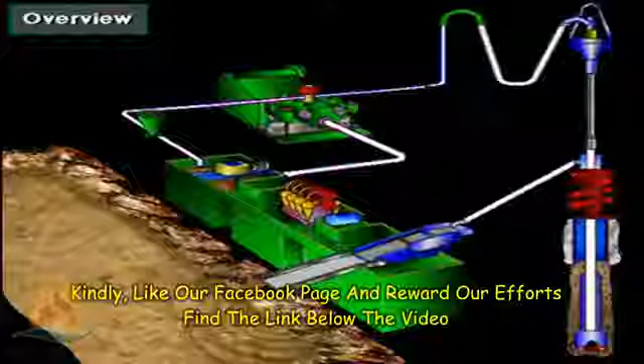The rig uses many pieces of equipment to circulate and treat or condition the mud. Mud circulation begins here, in the mud tanks, sometimes called the pits. Crew members prepare the mud in these tanks and make it ready for circulation.

The heart of the circulating system is the mud pump. Often, rigs have two pumps, one primary pump and one for backup. Or, if hole conditions require it, the driller can compound or combine the two pumps to circulate large volumes of mud. In fact, on deep wells, the rig may have 3 or 4 compound pumps.

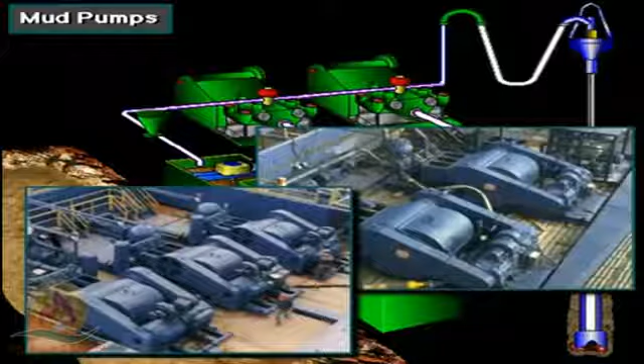The powerful pump or pumps pick up mud from the mud tanks and send it to the drill string and bit. The pump moves the mud into the discharge line, up the standpipe, and into the rotary hose.

The standpipe takes the mud about halfway up the mast. The rotary hose is attached to the standpipe. It is a strong, flexible hose that moves with a swivel as it goes up and down in the mast.

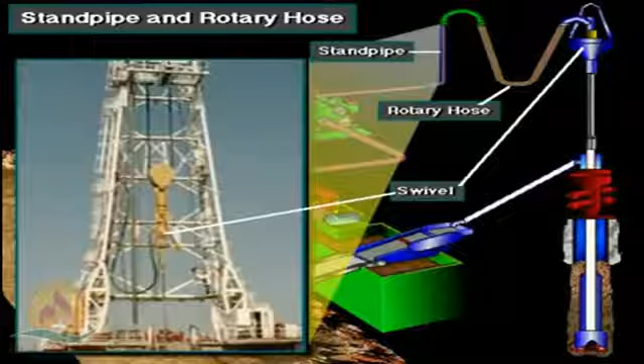From the rotary hose, the pump moves mud through the swivel and then down the Kelly and drill string. On rigs with a top drive, the mud moves through a passage in the top drive and then into the drill string. The pump moves the mud down the drill string to the bit.

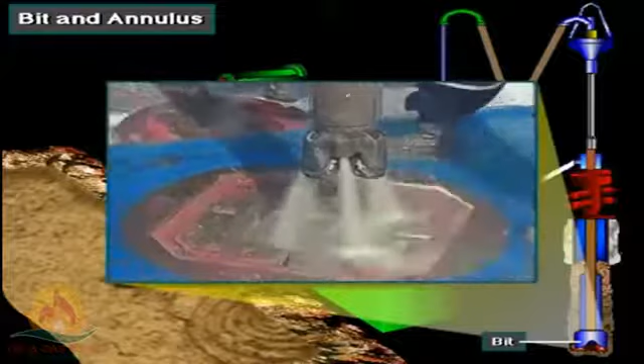At the bit, the mud jets out of the openings or nozzles in the bit. The jets of mud move cuttings away from the bit. Mud then continues up the annulus, carrying the cuttings with it.

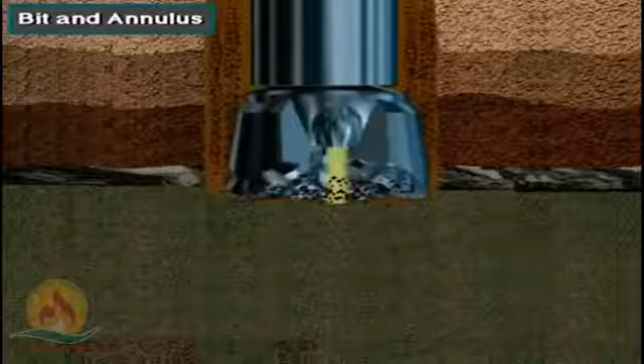From the annulus, the mud with the cuttings in it goes through the return line, sometimes called the flow line, to the shale shaker. The shale shaker removes the cuttings from the mud. The mud then falls into the mud tanks, where the mud pump can pick it up and continue the circulation process.

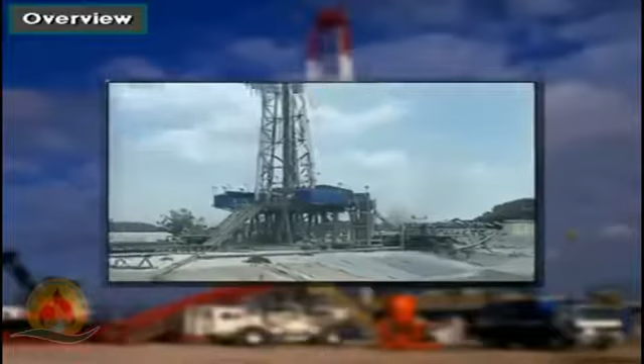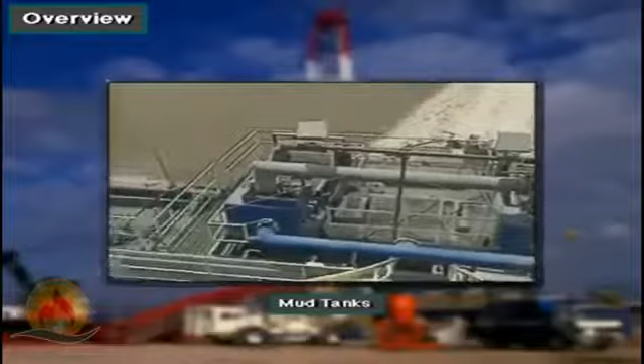Mud is made up at the rig location. Most rigs have several steel mud tanks. Mud and additives are mixed and held in the tanks.

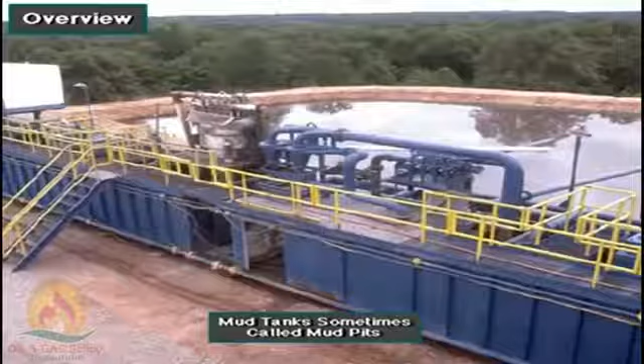Some land rigs also have a reserve pit dug out of the ground. Mud tanks are also called mud pits, a carryover from the days of earthen pits, but mud tank is the preferred term. The rig does not necessarily use all the mud tanks at once, although it does use several. The active tanks hold mud the pump actively circulates.

Often, mud components come to the rig in sacks. Normally, the crew stores the sacks in a special compartment called the mud house or sack room. The house or room keeps the sacks dry and allows them to be stored with care.

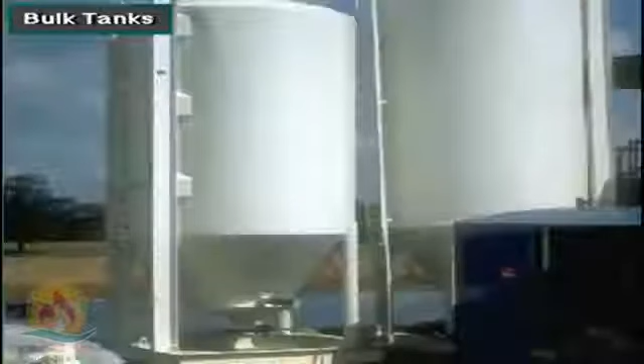These silo-like tanks are bulk tanks, or P-tanks. They hold mud additives like barite and bentonite. Crew members use some additives in such large quantities that suppliers load them into the bulk tanks to save time and money. Bulk tanks usually have their own hopper or pneumatic system for transferring the additives to the mud system.

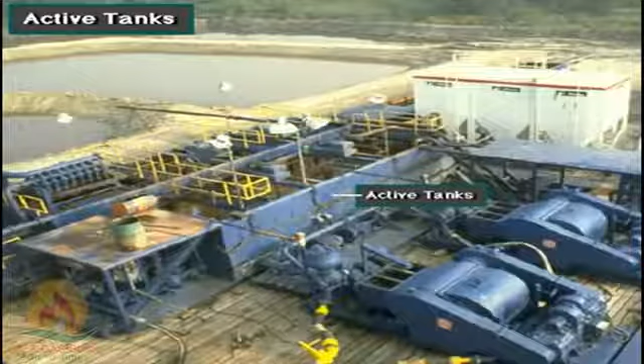The pump takes the mud out of the active mud tanks and circulates it through the system. Crew members connect the mud tanks with the piping and manifolds. The number of active mud tanks depends on the amount of mud needed to keep the hole full, and the volume required on the surface to keep the mud in good condition for circulating.

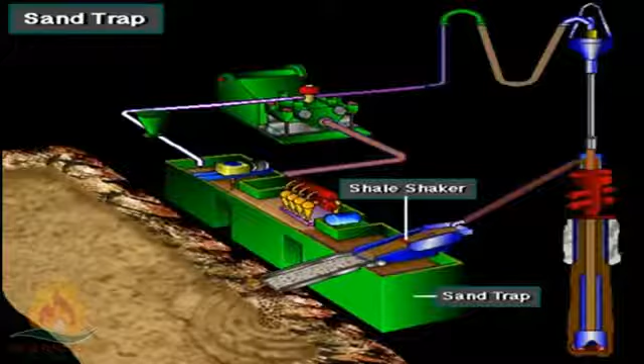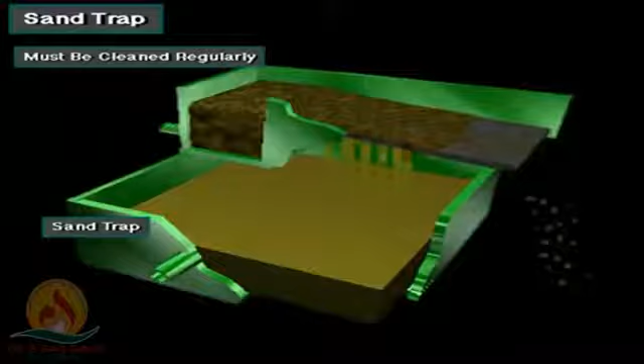The sand trap is the tank directly below the shale shaker. The shale shaker removes most of the cuttings from the mud, but some are so small the shaker cannot trap them. These fall into the sand trap, the first settling tank. Crew members have to clean it regularly to remove the built-up solids.

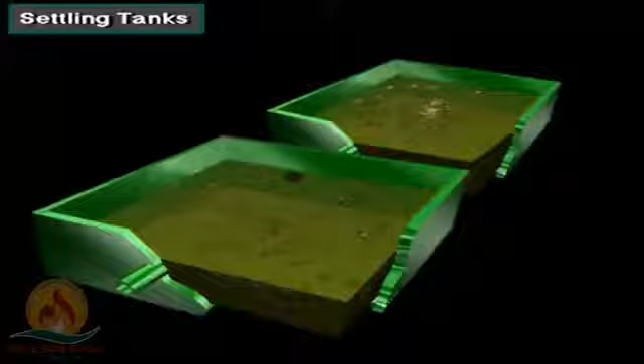Some small or old rigs may have 2 or more settling tanks in the tank system. They allow solids in the mud to settle out, but settling tanks do not do a very good job compared with newer generation solids removal equipment. So, today, most rigs use a desander and desilter. Reserve tanks are not a part of the active mud tank system.

The crew uses some tanks to hold excess mud, or to mix a different type of mud than the pump is currently circulating. They may also store heavy mud in them for emergency well control operations.

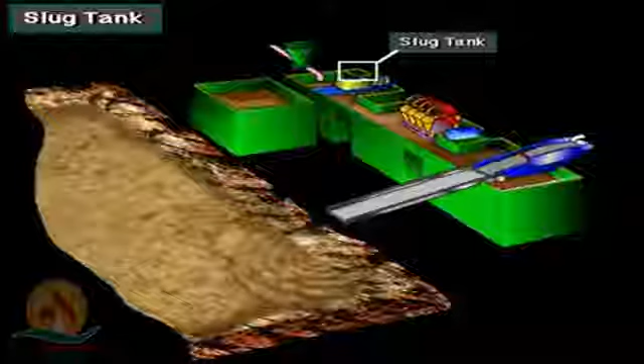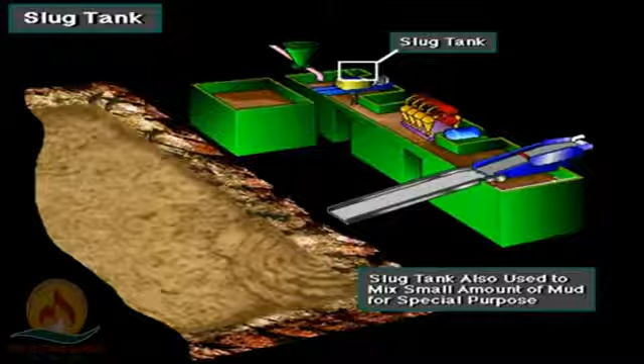A slug tank is a relatively small separate tank, or it may be a small separate part of a larger tank. The crew uses the slug tank to mix a slug, a small amount of heavy mud that is pumped down the string. Crew members may also use a slug tank to mix a small amount of mud for a special purpose. For example, the driller may need to place or spot a small quantity of high viscosity mud, also called a pill, at some point downhole.

The suction tank is where the mud pump picks up mud ready to circulate downhole. Mud in the suction tank should be clean, free of solids and gas, and properly formulated or conditioned.

Crew members use the chemical tank to mix special chemicals, such as caustic, that they will put into the active mud tanks.

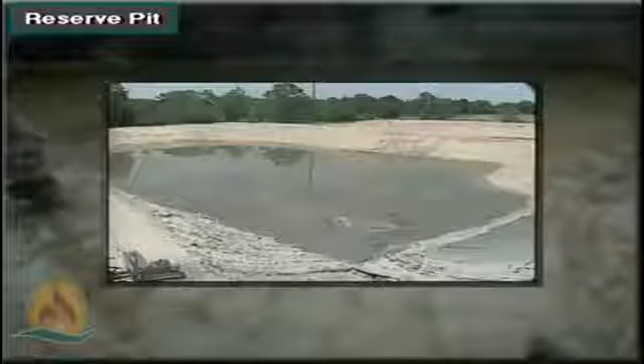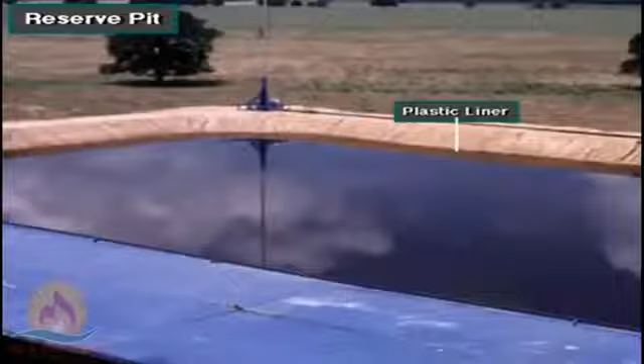On some land rigs, the rig owner digs a large pit next to the rig. This pit is called the reserve pit. The crew puts waste mud and runoff from the rig site in the reserve pit. In an emergency, they can also use it as a place to put more mud than the tanks can hold. Often, the rig operator lines the reserve pit with a thick plastic sheet to prevent liquids from leaching into the soil. And, if the rig is on a migratory bird flyway, the operator covers it with netting to keep waterfowl from landing in it.

Land rigs drilling in environmentally sensitive areas will not have a reserve pit. Instead, wastes and runoff are hauled to an approved waste disposal area.

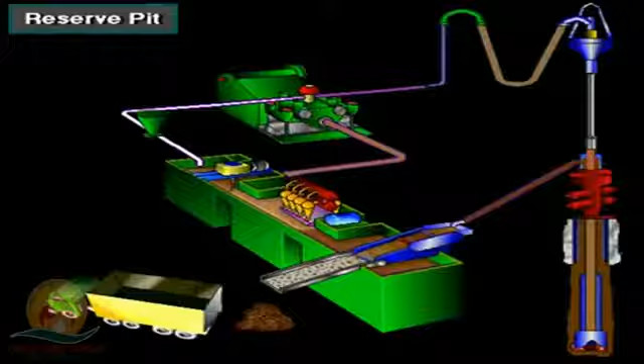Powerful mud pumps pick up mud from the suction tank and circulate it downhole, out the bit, and back to the surface. Although rigs usually have 2 mud pumps, and sometimes 3 or 4, normally they use only one at a time. The others are mainly used as backup in case one fails.

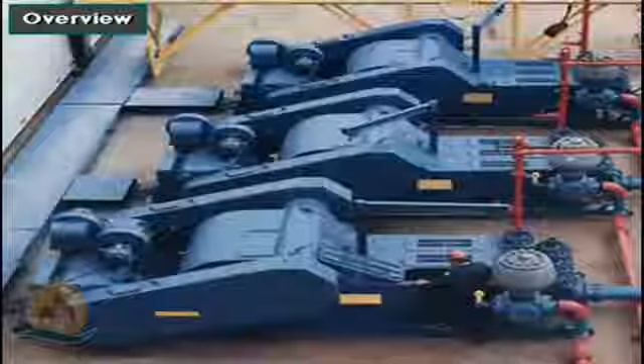Sometimes, however, the rig crew may compound the pumps. That is, they may use 2, 3, or 4 pumps at the same time to move large volumes of mud when required.

Rigs use one of 2 types of mud pumps: triplex pumps or duplex pumps. Triplex pumps have 3 pistons that move back and forth in liners. Duplex pumps have 2 pistons that move back and forth in liners.

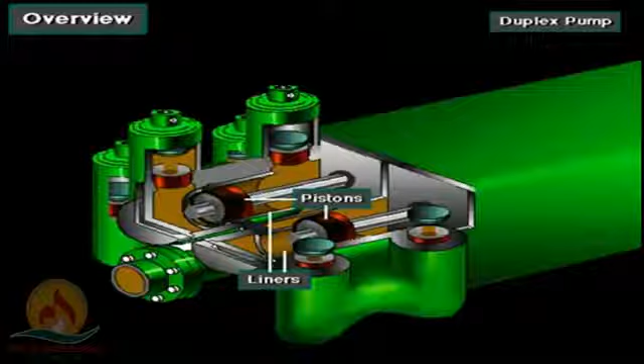Triplexes have many advantages. They weigh 30% less than a duplex of equal horsepower, or kilowatts. The lighter weight parts are easier to handle and therefore easier to maintain. Other advantages include: they cost less to operate, their fluid end is more accessible, and they discharge mud more smoothly. That is, a triplex's output doesn't surge as much as a duplex.

One of the most important advantages of triplex over duplex pumps is that they can move large volumes of mud at the higher pressures required for modern deep hole drilling. Triplex pumps are gradually phasing out duplex units.

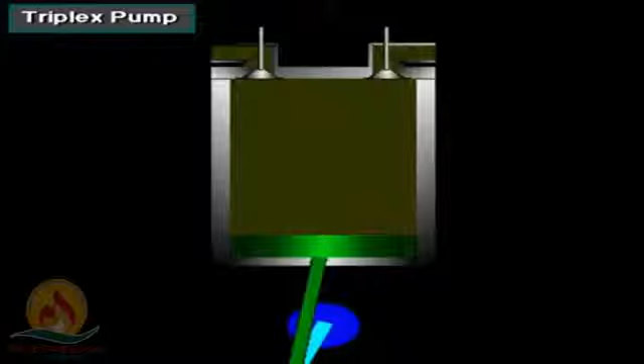In a triplex pump, the pistons discharge mud only when they move forward in the liner. Then, when they move back, they draw in mud on the same side of the piston. Because of this, they are also called single-acting.

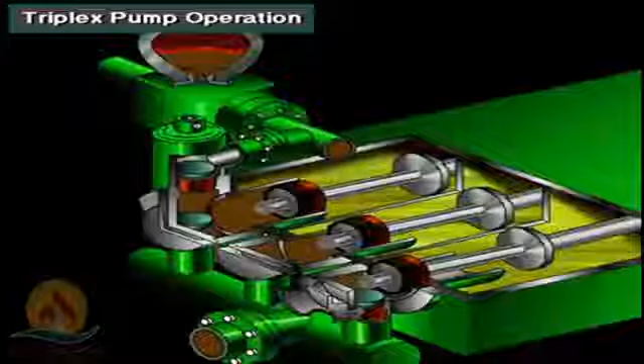Here's a schematic of a triplex pump. It has 3 pistons, each moving in its own liner. It also has 3 intake valves and 3 discharge valves, and a pulsation dampener in the discharge line.

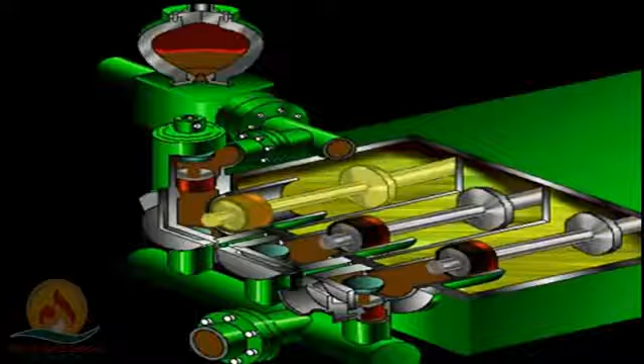Look at the piston at left. It has just completed pushing mud out of the liner and through the open discharge valve. The piston is at its maximum point of forward travel. The other 2 pistons are at other positions in their travel, also pumping mud. But right now, concentrate on the left one to understand how the pump works.

The left piston has completed its backstroke, drawing in mud through the open intake valve. As the piston moved back, it lifted the intake valve off its seat and drew mud in. A strong spring holds the discharge valve closed.

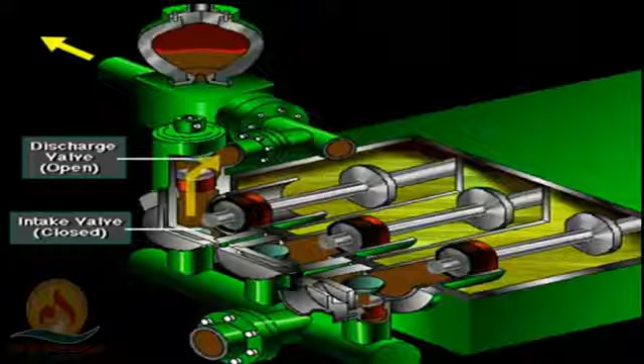The left piston has moved forward, pushing mud out through the now open discharge valve. A strong spring holds the intake valve closed. The left piston has completed its forward stroke, the full length of the liner, completely discharging the mud from it.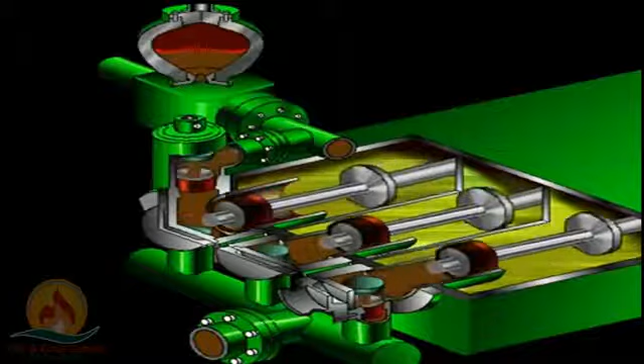All three pistons work together to keep a continuous flow of mud coming into and out of the pump. Crew members can change the liners and pistons. Not only can they replace worn-out ones, but they can also install different sizes.

Generally, they use large liners and pistons when the pump needs to move large volumes of mud at relatively low pressure. They use small liners and pistons when the pump needs to move smaller volumes of mud at relatively high pressure.

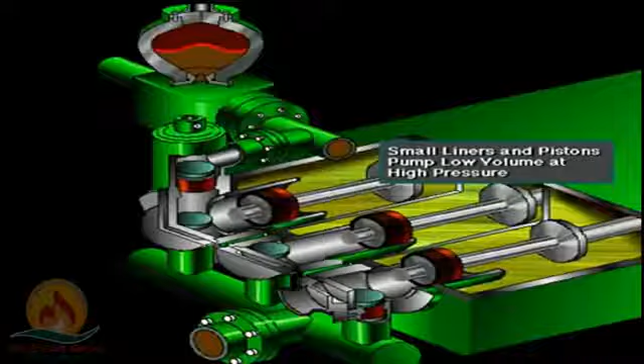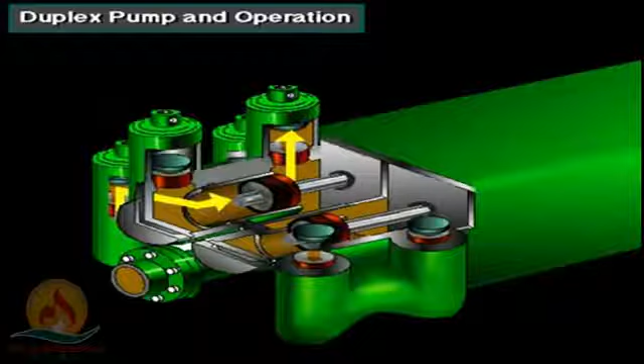In a duplex pump, the pistons discharge mud on one side of the piston and, at the same time, take in mud on the other side. Notice the top piston and liner. As the piston moves forward, it discharges mud on one side as it draws in mud on the other. Then, as it moves back, it discharges mud on the opposite side and draws in mud on the side where it had earlier discharged it. Duplex pumps are therefore double-acting.

Double-acting pumps move more mud on a single stroke than a triplex. However, because they are double-acting, they have a seal around the piston rod. The seal keeps them from moving as fast as a triplex. Input horsepower ranges from 190 to 1,790, or from 142 to 1,335 kilowatts. The largest pump's maximum rated working pressure is about 5,000 psi, almost 35,000 kilopascals, with 6-inch, 152 millimeter liners.

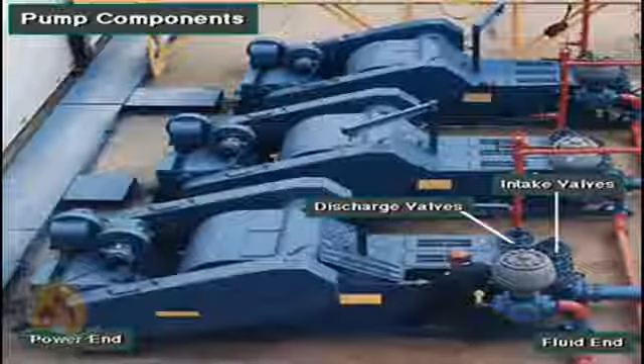A mud pump has a fluid end, power end, and intake and discharge valves. The fluid end of the pump contains the pistons with liners, which take in and discharge the fluid, or mud. The pump pistons draw in mud through the intake valves and push mud out through the discharge valves.

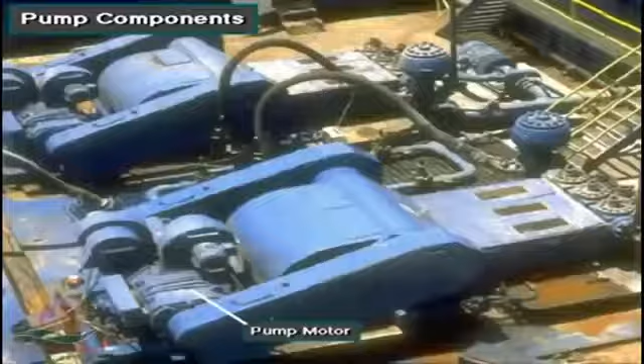The power end houses the large crankshaft and gear assembly that moves the piston assemblies in the fluid end. Pumps are powered by a pump motor. Large modern diesel-electric rigs use powerful electric motors to drive the pump. Mechanical rigs use chain drives or power bands, belts, from the rig's engines and compound to drive the pump.

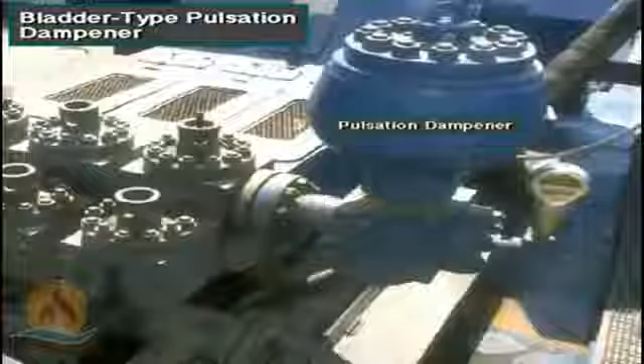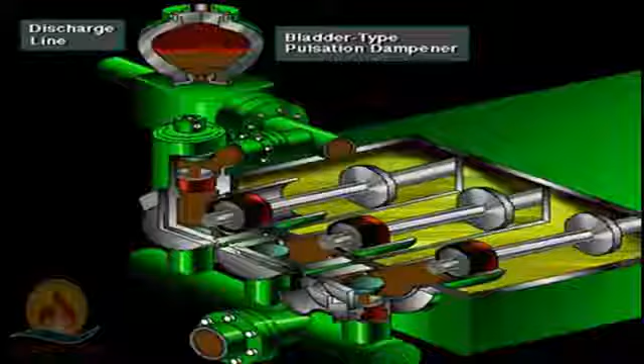A pulsation dampener connected to the mud discharge line smooths out surges created by the pistons as they discharge mud. This is a standard bladder-type dampener. The bladder in the dampener body separates pressurized nitrogen gas above from mud below. The bladder is made from synthetic rubber and is flexible. When mud discharge pressure presses against the bottom of the bladder, nitrogen pressure above the bladder resists it. This resistance smooths out the surges of mud leaving the pump.

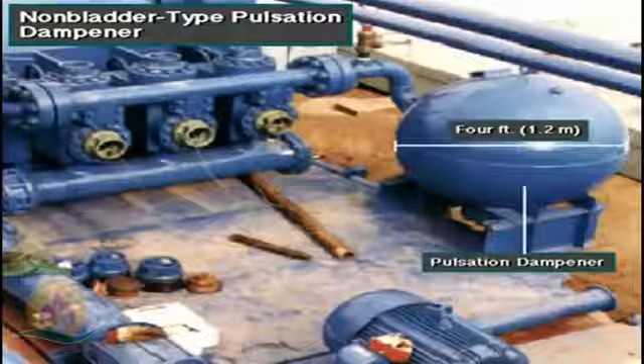Here is the latest type of pulsation dampener. It does not have a bladder. It is a sphere about 4 feet or 1.2 meters in diameter. It is built into the mud pump's discharge line. The large chamber is full of mud. It has no moving parts, so it does not need maintenance. The mud in the large volume sphere absorbs the surges of mud leaving the pump.

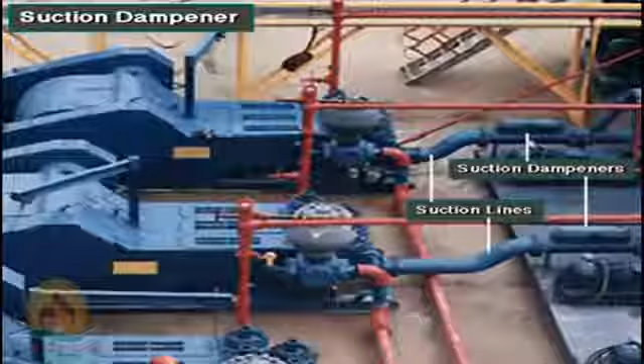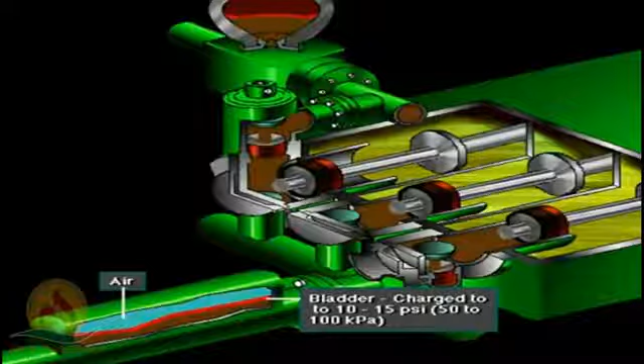A suction dampener smooths out the flow of mud coming into the pump, mounted on the triplex mud pump suction line. Inside the steel chamber is an air-charged rubber bladder, or diaphragm. The crew charges the bladder about 10 to 15 psi, 50 to 100 kPa. The suction dampener absorbs surges in the mud pump suction line caused by the fast-moving pump pistons.

The pistons constantly start and stop the mud's flow through the pump. At the other end of the suction line, a charging pump sends a smooth flow of mud to the pump's intake. When the smooth flow meets the surging flow, the impact is absorbed by the dampener.

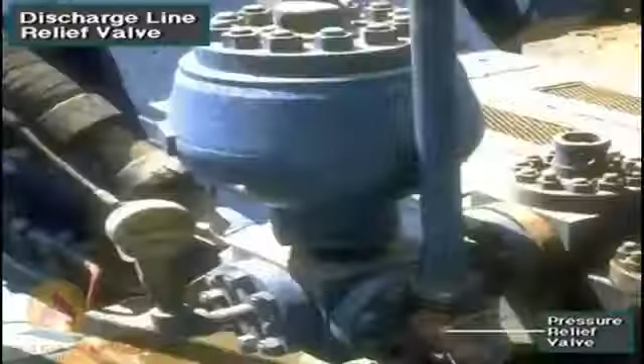Workers always install a discharge pressure relief valve. They install it on the pump's discharge side, in or near the discharge line. If for some reason too much pressure builds up in the discharge line, perhaps the drill bit or annulus gets plugged, the relief valve opens. The open valve protects the mud pump and system against damage from overpressure.

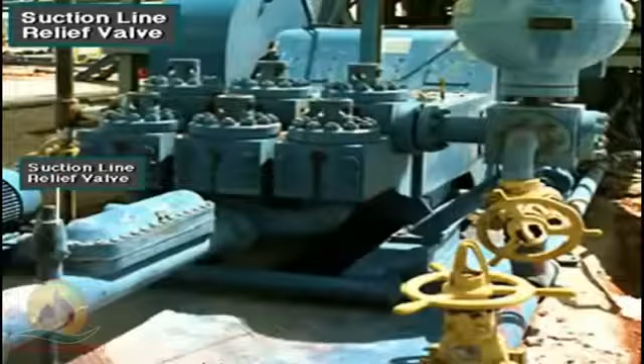Some rig owners install a suction line relief valve. They install it on top of the suction line, near the suction dampener. They mount it on top so that it won't clog up with mud when the system is shut down. A suction relief valve protects the charging pump and the suction line dampener. A suction relief valve usually has a 2-inch or 50 mm seat opening. The installer normally adjusts it to a 70 psi or 500 kPa relieving pressure.

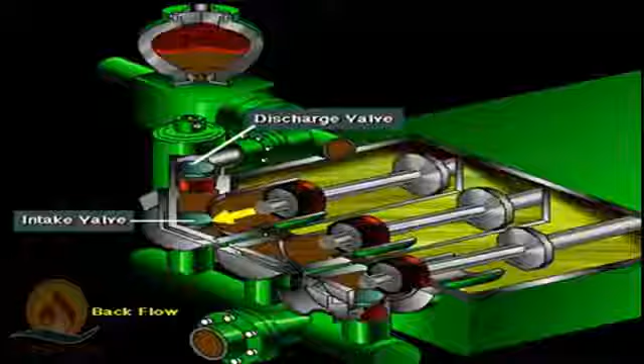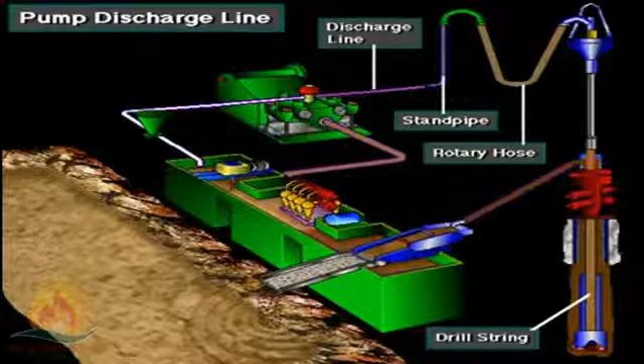If both the suction and discharge valves failed on the same side of the pump, a high backflow or a pressure surge would occur. The high backflow could damage the charging pump or the suction line dampener. The discharge line is a high-pressure line through which the pump moves mud. From the discharge line, the mud goes through the standpipe and rotary hose to the drill string equipment.

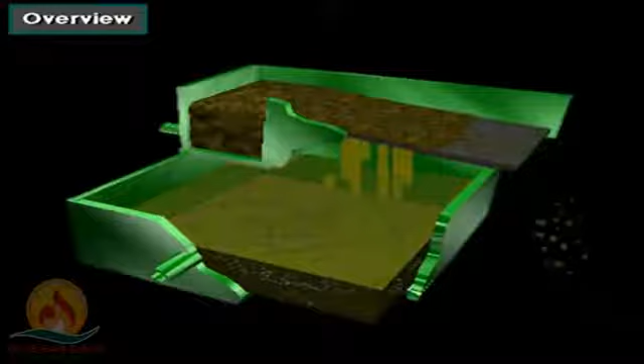The shale shaker mechanically takes out the large cuttings from the mud. It does not, however, remove very fine cuttings and other small solid particles. These solids can be fine sand particles and other very fine materials, often called silt. Good drilling practice requires removing these undesirable solids.

If not removed, the solids can increase the weight of the mud more than required, reduce the bit's penetration rate, and significantly increase the rate of wear on circulating equipment. The rig uses mechanical solids removing equipment, such as hydrocyclones and centrifuges, to remove the fine solids.

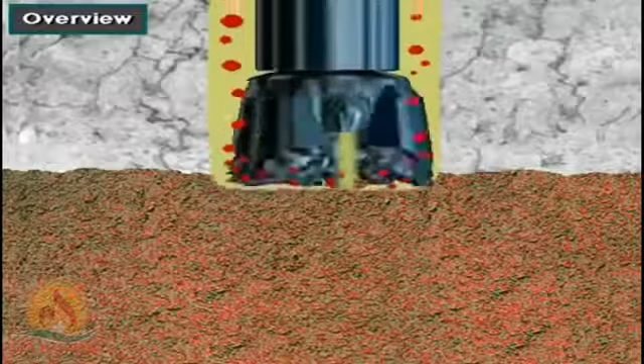Sometimes, the hole penetrates a formation that has small amounts of gas. This gas gets into the mud, becomes entrained in it, and must be removed before the pump recirculates the mud back down hole. A degasser removes entrained gas from the mud.

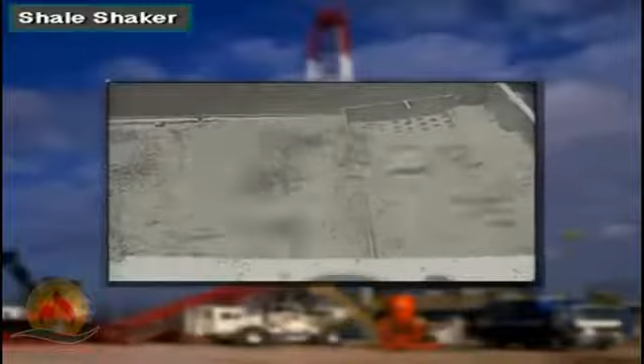The shale shaker has rapidly vibrating screens. The mud and cuttings from the return line fall onto it. The vibrating screens catch the larger cuttings. These cuttings fall into the reserve pit, the sea, or other container for disposal. The liquid mud goes into the sand trap, which is a special mud tank.

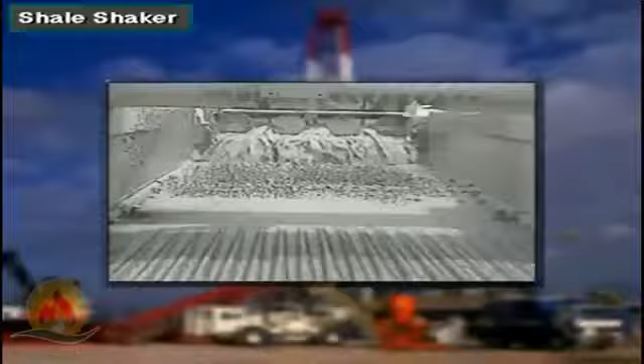Shale shakers look simple. In fact, though, manufacturers carefully design them to make the screens vibrate in a very controlled way.

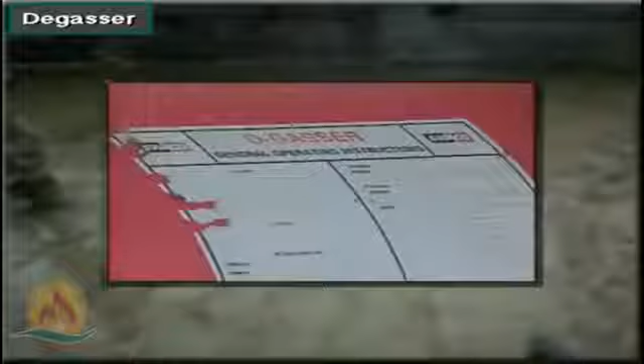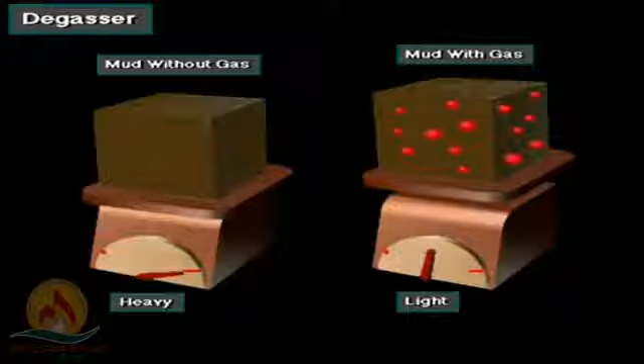Sometimes, the crew sends mud through a vacuum degasser. The degasser removes gas from the mud. If the gas were not removed, it could make the mud too light, not dense enough. As a result, the well could kick. Formation fluids can enter the wellbore and have to be controlled to prevent a blowout.

Another problem: if the driller recirculates gas-cut mud, the gas could cause the mud pumps to gas lock. Gas-locked pumps pump gas and mud instead of just mud, which is highly inefficient. So, to remove gas, crew members use a degasser.

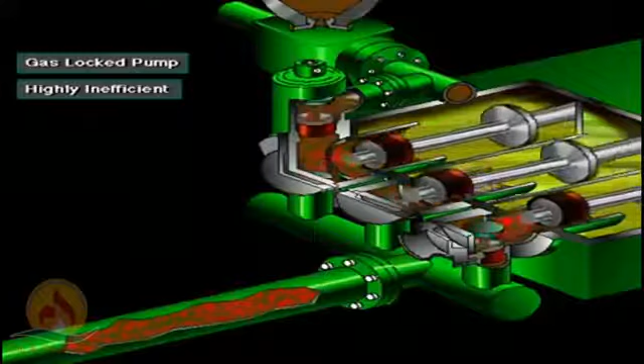In a vacuum degasser, mud with gas in it enters at the top and spills out over several baffle plates, a spreader. Spreading out the mud presents a large surface area for the gas to break out. Also, the vacuum pump creates a vacuum, pressure lower than the surrounding atmosphere, inside the degasser. This vacuum makes it very easy for the gas to escape from the spread-out mud. The removed gas leaves through a vent, which sends the gas a safe distance away from the rig. The gas-free mud falls to the bottom and goes back into the mud tanks downstream from the degasser.

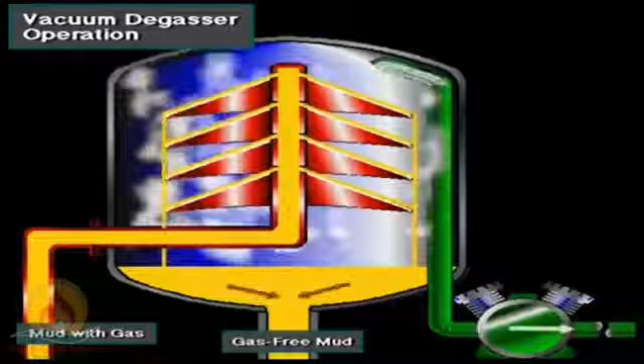A desander has large cones. It removes particles as small as about 40 microns. A micron is 1/1,000,000th of a meter, which is very small. A desilter has smaller cones than a desander. Desilters remove particles down to about 20 microns.

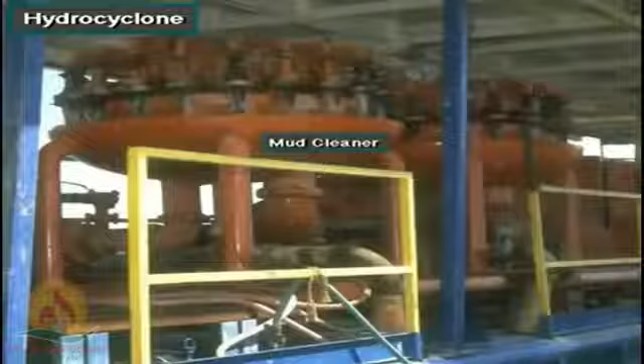A mud cleaner has still smaller cones. It removes particles down to about 7 microns. Since barite, that desirable solid which gives weight to the mud, is also about 7 microns, screens are included on mud cleaners to retrieve the barite so it can be returned to the system.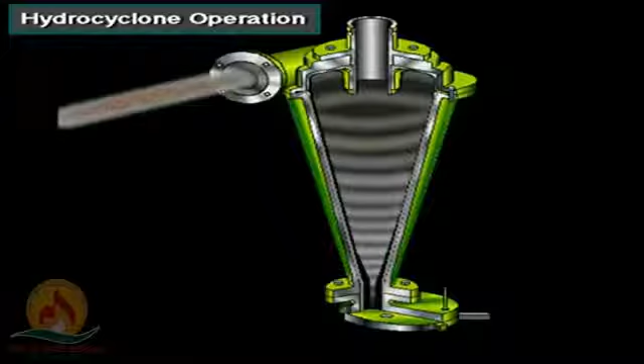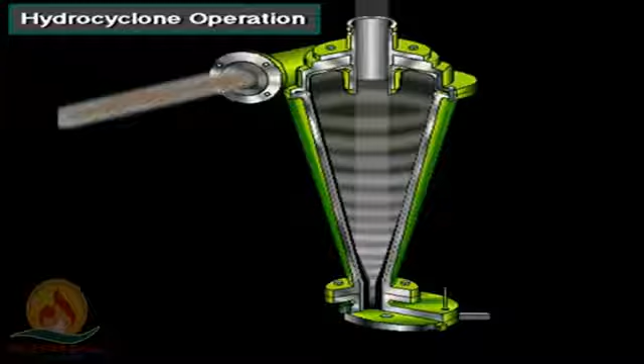Inside the cone, mud enters from the side and spirals down. This movement flings the solids to the side. The spiraling action creates a vortex in the center, somewhat like a tornado. It is an area of lower pressure, so the vortex sucks the liquid mud up through the center and out through the top of the cone. Meanwhile, the solids slide down the side and out the bottom of the cone.

The smaller the cone, the smaller is the particle it can remove, but more cones are needed to handle a given volume of mud.

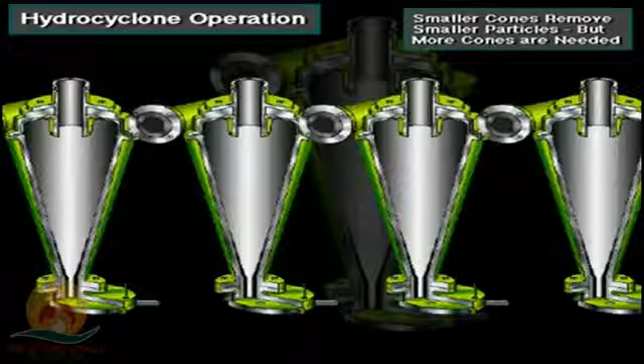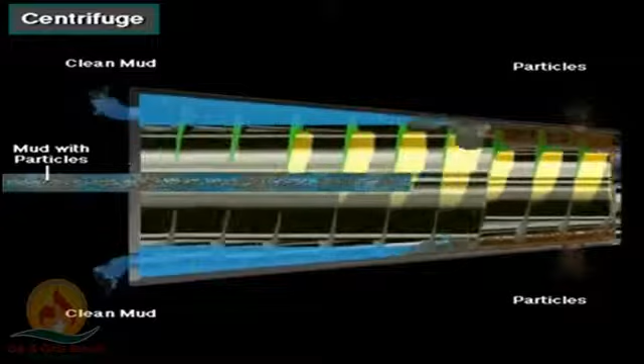A centrifuge spins mud at high speed. This creates centrifugal force. Centrifugal force throws the particles to the side of the centrifuge, where they are removed. A centrifuge removes particles as small as 2 to 5 microns, which includes barite.

Sometimes, crew members run a centrifuge at a specific speed to remove barite, so the rig can use it again on the next hole.

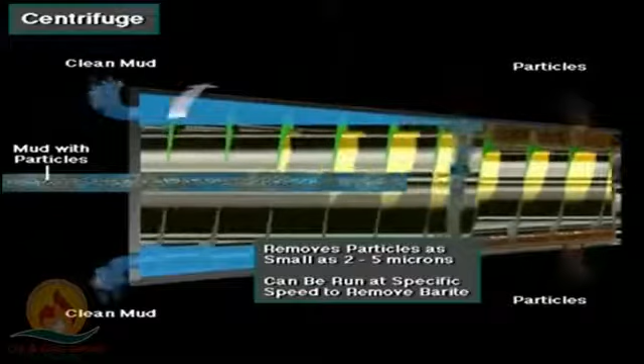Occasionally, the rig owner runs two centrifuges. The first removes the barite, and the second removes the finer particles. Crew members then re-add the barite to the mud system.

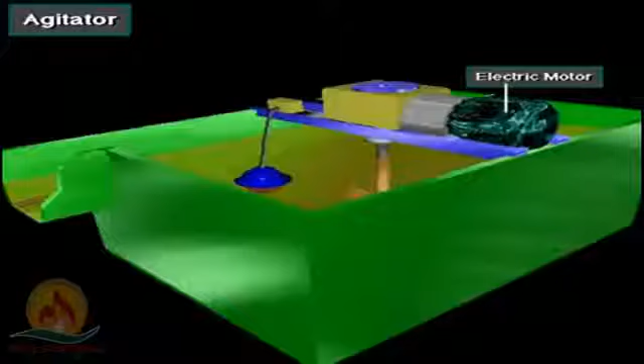Crew members mount agitators on one or more of the tanks. Agitators stir the mud in the tanks to keep solids from settling and to maintain uniform mud properties. One popular agitator is the paddle type. An electric motor rotates paddles to stir the mud.

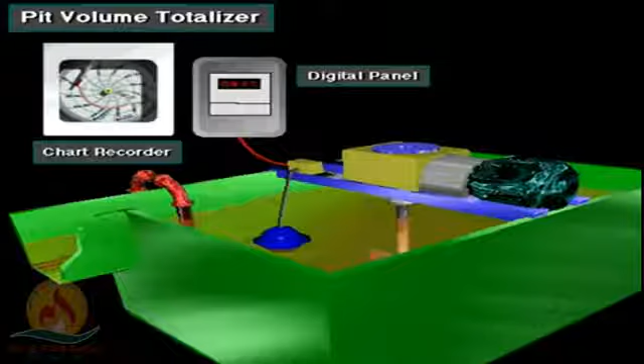A pit volume totalizer, or PVT, alerts the driller to changes in the level of mud in the tanks. A float in each tank rises or falls if the mud level rises or falls. For example, if the level rises, the rising floats send a signal to a recorder and to a digital panel on the rig floor. The panel alerts the driller of the rise.

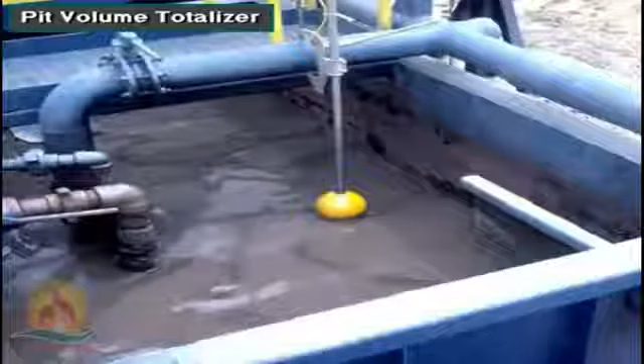This device is called a pit volume totalizer, or PVT, because it measures the gain or fall in each of the tanks or pits, totals the gain or fall, and sends this information to the driller on the rig floor. If the mud level in the tanks falls, the PVT also alerts the driller. This float in a mud tank is part of a pit volume totalizer. Usually, crew members install a float in each active tank. The floats rise or fall with the mud level in the active tanks.

Mud level in the tanks is vital information. If the mud level rises, it often means that the well has kicked. Formation fluids have entered the hole and forced mud out. The kick fluids replace mud in the hole and cause the mud level in the tanks to rise.

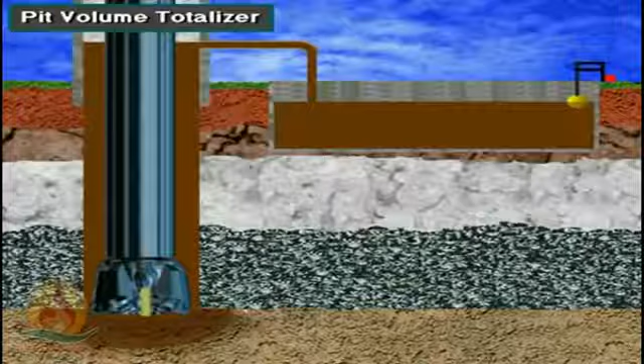On the other hand, if mud begins going into a formation, if mud is lost to the formation, the mud tank level drops. Lost circulation can also be a serious problem. The decrease in height of mud in the hole could lead to a kick because hydrostatic pressure is reduced. Also, drilling without mud returning to the surface is like drilling blind. No communication between the bottom of the hole and the surface exists.

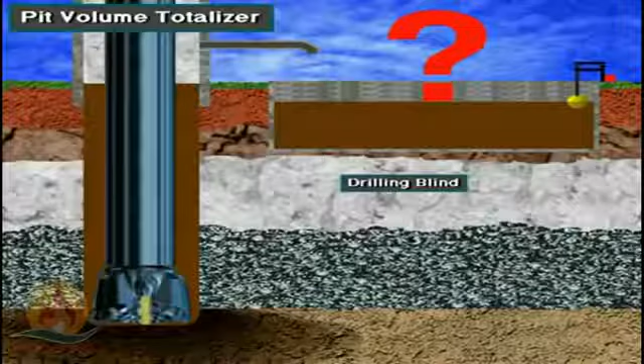The mud system normally has several centrifugal pumps. A centrifugal pump puts out relatively low pressure, but it can move a large volume of mud. Crew members, therefore, use them in several ways.

One job a centrifugal pump often does is supercharge the mud intake of the main mud pump. The small pump takes the mud from a suction tank, moves it through a line connected to the main pump's suction line, and keeps the suction line full of mud at all times. If the system does not use a charging pump, the force of gravity alone feeds the pump's suction line.

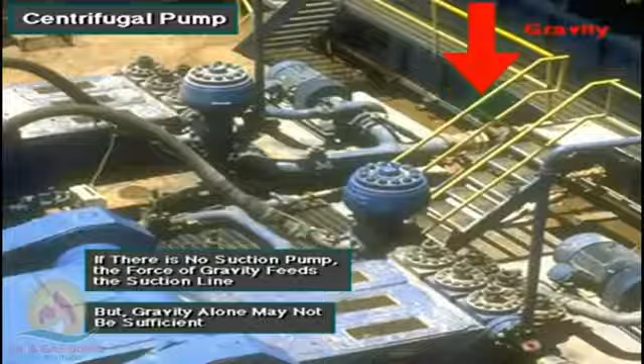Sometimes gravity cannot keep the pump's intake completely full of mud. The pump pistons suck in the mud so fast that gravity cannot keep the suction line full of mud.

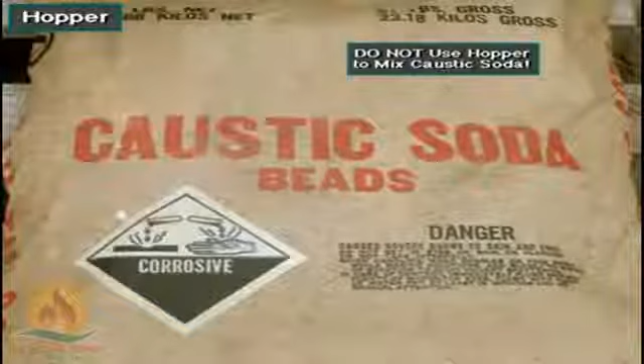The crew also uses a centrifugal pump to mix some mud components. A hopper is like a big funnel. Crew members put sacks of mud material into it. They do not, however, use the hopper to mix caustic soda. The hopper can blow dry caustic back into the face of the worker mixing it. In addition to being dangerous, adding caustic through the hopper can flocculate the mud, causing it to clump up.

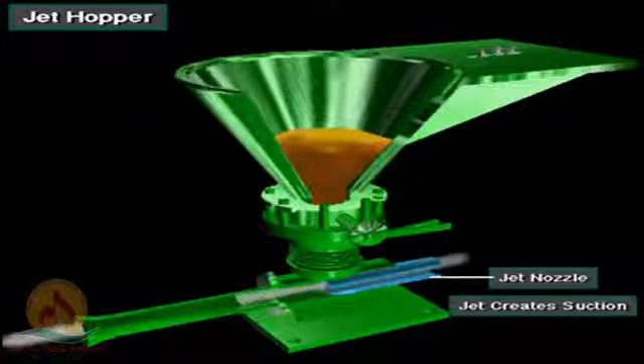A crew member opens the sack of material at the top of the hopper and feeds the material into the funnel. At the same time, a jet of mud from a centrifugal pump goes through a nozzle at the bottom of the funnel. This jet creates suction. The suction pulls the material into the mud stream.

Or, if hole conditions require it, the driller can compound or combine two pumps to circulate large volumes of mud. In fact, on deep wells, the rig may have three or four compound pumps. The powerful pump or pumps pick up mud from the mud tanks and send it to the drill string and bit.

The pump moves the mud into the discharge line, up the standpipe, and into the rotary hose. The standpipe takes the mud about halfway up the mast.